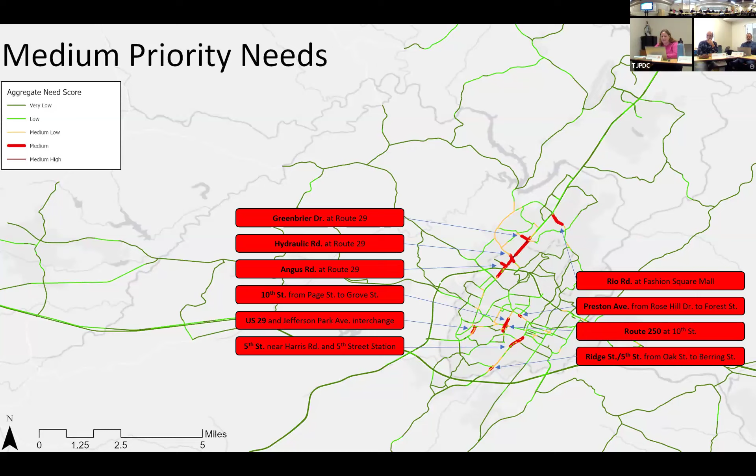And then when we go on to the scores that were between 4 and 5 with the aggregated needs, you can see that we start growing the list of needs. A lot of these are on our radar as far as concerns specifically around the 29 corridor, 5th Street, and 250. I think we're all aware that there are some concerns there.

And then we can go down to the medium low needs. So probably these two categories would make sense to identify as high priority needs based on the aggregated score. These could be considered medium needs.

And again, I think this makes sense intuitively to me, at least, why these projects are included. I think most of us have some awareness about most of these locations.

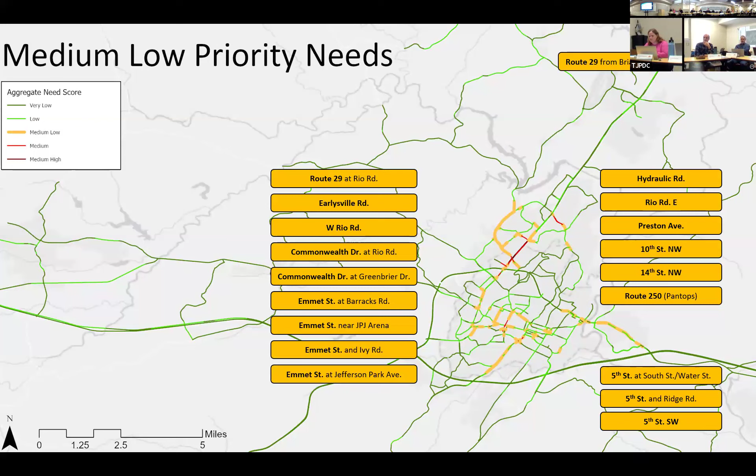And then if we go down to the last screen, all these segments that are in the dark and light green have often been pulled in as needs, just not necessarily triggering those higher need thresholds.

So the next step is really going to be to have you all review this information. Tell me which of these make sense. Make sure that we're vetting all of the need segments to determine whether we already have funded projects addressing some of these needs, so we can remove those from our candidate project list.

And then we'll start working through our candidate project list to determine which projects we already have queued up, have done some level of analysis, and have been developed enough to bring onto our list for consideration in our high priority constrained list. We'll also identify segments where we don't have a good project identified yet, so we can flag those for planning priorities.

So that's going to be our next step. But this is the data analysis piece. We're going to map this against the public engagement that we received. We have a heat map, so we're going to overlay these two.

And then we're going to be working with the localities so that we make sure that any of the priorities they have identified are also being pulled into our long-range transportation plan, to make sure those are supported as well. Do you want to add anything at this point, Alan?

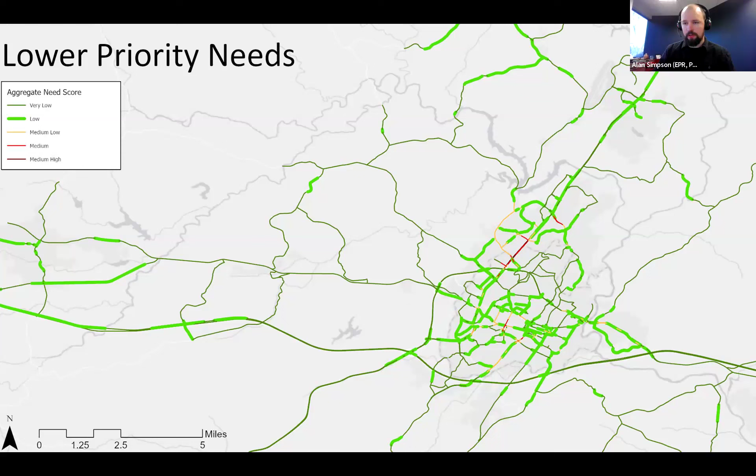I don't have anything to add right now. I think you covered pretty much everything, but if there are questions, I'm happy to answer them.

Okay, so any questions or discussion from you all - anything that surprises you, anything that you think shouldn't be included that was identified, or anything that should be included that maybe hasn't been identified in one of these top tiers at this point?

And I know that doing this analysis, it did not include the committed projects that you mentioned. But just to emphasize again, if there's a project in the city or county that overlaps with one of these segments, that project might not necessarily solve that need. But at least, even if it's small, it would be really helpful to bring that in and compare it to the need to see if that project might resolve it or at least influence it in some way. That would be great.

Do you have, Alan, sorry to put you on the spot, we didn't discuss this ahead of time, do you have the public engagement heat map you could share? I do, it'll just take me a moment to pull it up. One second, okay, just so you all can see that as well.

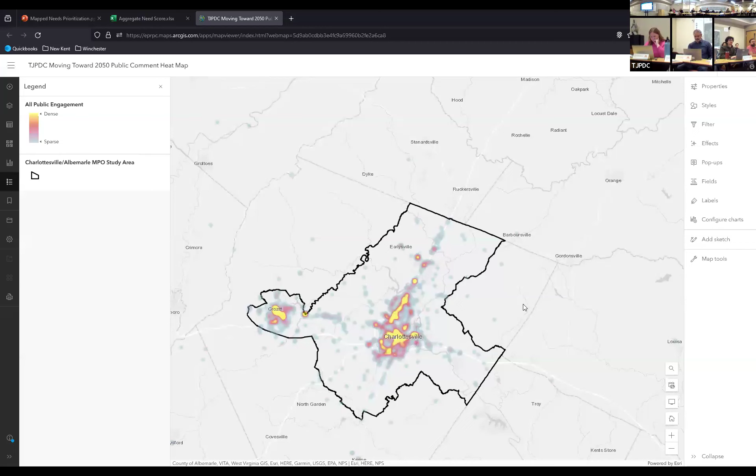So this is the heat map of public comments received from all the public engagement we've done. Sandy, is there anywhere you'd like me to zoom into, or do you just want to take a look at it overall here? I think if there's anything that maybe stands out to you as being in addition to what's seen in the data analysis, if there's anything you want to walk through.

Yeah, the first thing that jumps out to me is that Crozet is represented much more heavily on this map than you see in the needs prioritization map. I think at first glance the 29 corridor is well represented here. Downtown Charlottesville seems to align pretty well with the segments we just looked at. You've got some heat spots further up 29 North, the airport, obviously a couple of interchanges up there. Crozet, a little bit over, it's not the most intense heat map section, but closer to Ivy you've got some activity there. So I think this picks up a few things that aren't included in the needs prioritization map, but there's also a lot of overlap.

I will say, in terms of corridors, I'm surprised it didn't show up as a medium or high priority, East High Street. I mean, we are seeing it's pretty well lit up on our public comment map here, but it didn't really show up on either of those. And that's one of the reasons we like to do the heat map on the engagement too. The quantitative data can show us what's going on really from the data-driven side of it, but sometimes that data has holes in it. Seeing what the public sees in their qualitative experience of the transportation network might help us identify what data is maybe missing from this, or if there's a different angle to that data.

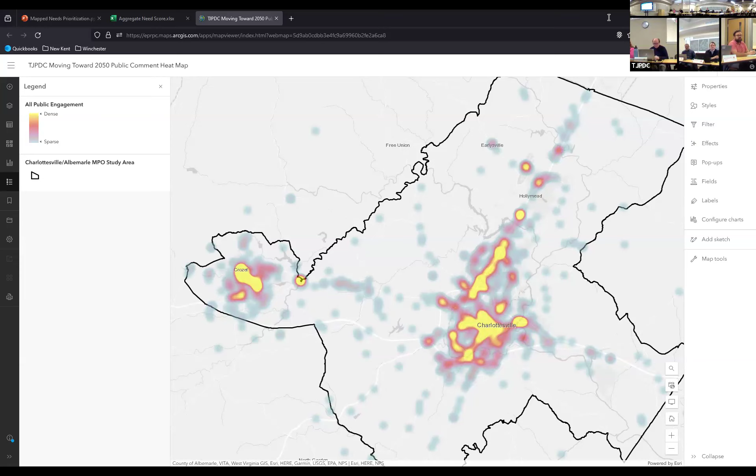That's also kind of needed for the people who participated in this process and past processes, just to show what people are talking about. Certainly this process, and no LRTP process I know of, is a census of everyone. So of course there would be some response bias of what areas are represented or not, but it's at least showing a general geographic distribution. Again, that's not the only analysis we're looking at - it's not just geographic, but also what they were telling us, what specifically those comments are, and how that connects with the needs and the projects. So that's just one way of looking at it.

Again, that map Alan was showing, we can make available on the SharePoint as well. It's a little overwhelming to see all those dots on one map.

We also overlay future growth projections on areas. That's where the travel demand model would potentially provide some additional context, with the caveat that it was a fairly high level review of the growth projections. I think it still gives us a good indication of maybe where there are likely going to be problems in the future, but it's not necessarily 100% consistent with the new Charlottesville zoning ordinance and comprehensive plan, for example.

We are updating the travel demand model, so by the time we do this in five years, we'll have more precise information for you all.

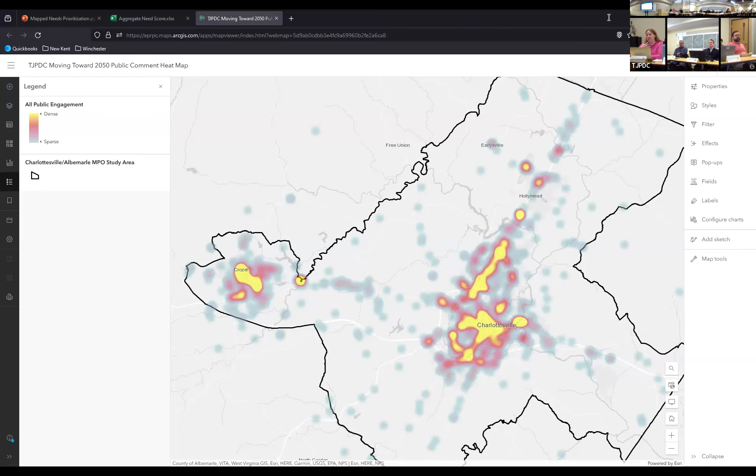So if you all want to spend some time looking at this, I'll continue to put more information into that SharePoint file. I may not update you all as I do that, but you're always welcome to check back into that and explore that information. If you have comments, feedback, or questions, please feel free to shoot that to us, and we can make sure that's incorporated as we start evaluating the projects.

Yes. And another thing, just keep in mind, this is all data, and the PDC is not taking the approach of just blindly following exactly what this data says - if it shows red, that's what we're doing. We're presenting this data to decision makers to help them make the best decisions they can. There are some quantitative aspects to this, but it's really there to help you all and the policy board think through, given what we're seeing here, to help us make as informed a decision as possible.

And just going to amend, I wasn't super concise with my language earlier. On the needs map, I said any projects in those needs areas could possibly influence things - that are committed and funded - but also if there's some pending land use application or element to it, that can certainly influence things as well. We might not be able to calculate exactly how that would influence the needs, but at least being aware of it matters. So if one area is showing up as red, and there's a huge new development coming in that's imminent, that's a good thing for us to know.

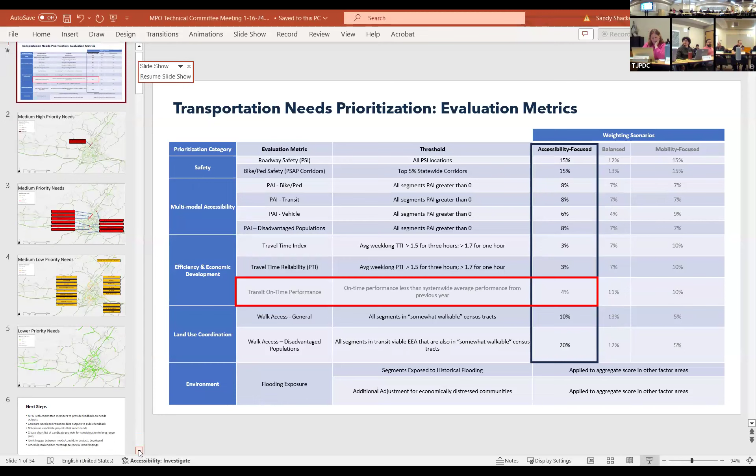So we have been working to vet all the potential projects that the MPO would be eligible to submit. Our goal is really to have consensus around the projects that we're going to move forward with and that we want to be pursuing in the next month or two.

If you all feel like you can make a recommendation this morning, certainly happy to receive that, but we can also continue to have this discussion next month as well. So with the new changes to the Smart Scale scoring process...

That significantly limits the number and types of projects that MPOs and other regional bodies are eligible to submit. So we're starting off with looking at what we're eligible to submit that we have enough information on to move forward and prepare an application for.

One thing I want to mention is that at the most recent CTB meeting, the Commonwealth Transportation Board reversed their vote on land use. So land use is back into being a consideration, but it's in that modified application—it's a multiplier. So it will still have much less significant impact than it did, but it will still be part of the consideration.

So based on the action from the CTB, and based on our list of projects that we've been working through and have enough information to move forward on, the projects that are potentially candidates for the MPO to submit would be a DDI or another identified alternative at the 64 and 5th Street interchange.

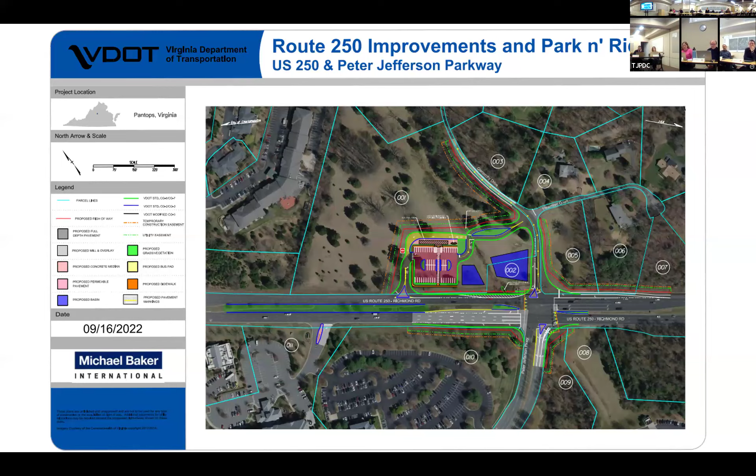And then at Rolkin Road, this would be adding some pedestrian crossing at 3 of the 4 quadrants - across the southern portion and northern portion of Rolkin Road, and then across 250, and then also adding some sidewalk along the south end of Peter Jefferson Parkway or Richmond Road.

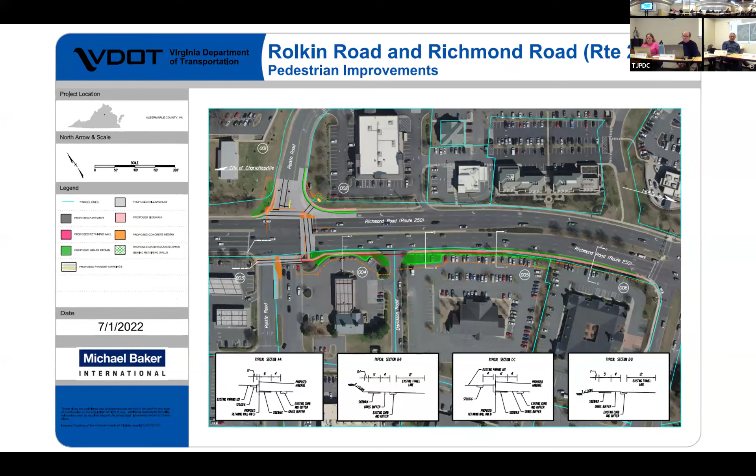So again, this could be submitted as a bundle. They actually both scored pretty well in Smart Scale. Peter Jefferson Parkway, that project had some significant benefits aside from land use, so that is a project we can submit. Yeah, they were both - Rolkin was right on the bubble. It would have been the next project funded if we had more money.

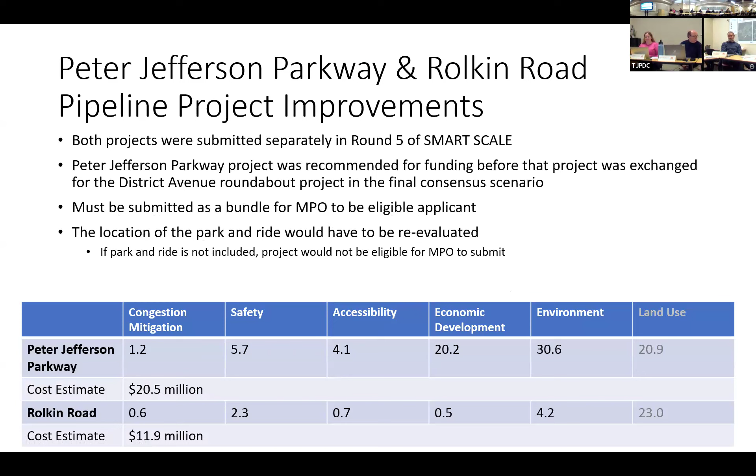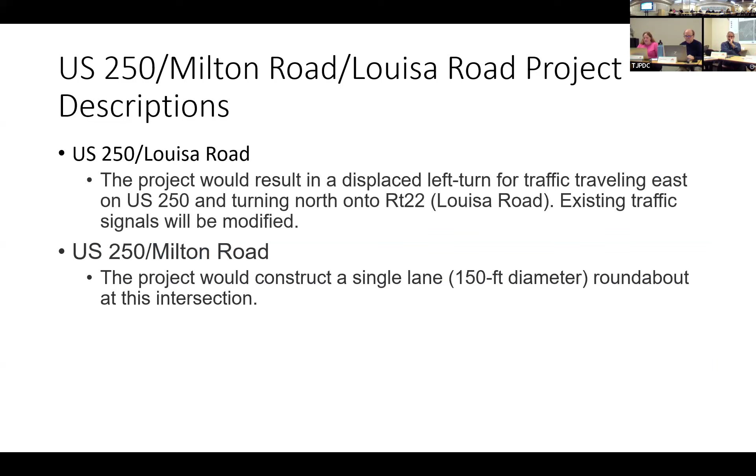All right, and then the next project is the US 250 Milton Road and Louisa Road project. Again, this is a set of 2 projects. One thing is that while there are some safety needs identified there, neither of these scored very well on Smart Scale. So the MPO could be eligible to submit it, but it probably isn't likely that it would be competitive. At 250 and Louisa Road, this would add a displaced left turn at that intersection, so there wouldn't be turn movements allowed from 250 onto the road here.

Basically, you make the left turn in this area right here and get over on the other side of the road, and you would travel down here and then make the left at the intersection. So you can't make the left from the through lane, it just goes through - you make the left from this lane here. Is that signalized there? Yes, it would be signalized. So you cross over - the through lane, you'd be on the outside of the receiving through lane. And then the right turn lane is moved over further.

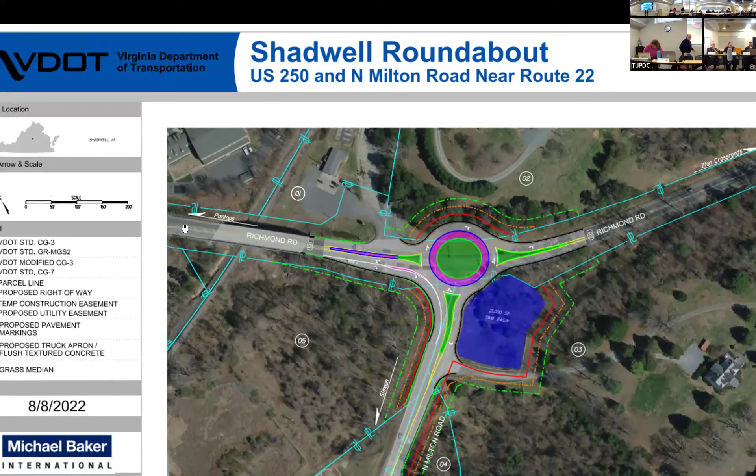It's because it's expanded, that's why. There you go. But yeah, that seemed to be the most feasible, least expensive option. We did look at a roundabout, and from an operational standpoint, it didn't work as well.

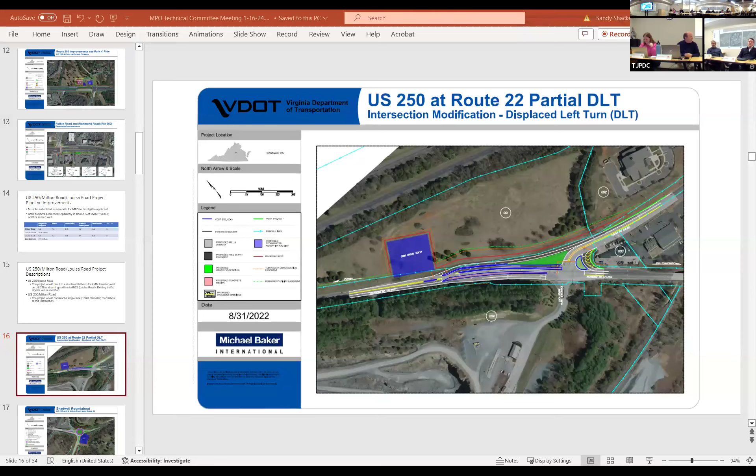So mainly the issue there is the approach from 250 eastbound - that's where the issue is. It's the left turns, the queues, the rear ends and that stuff from that direction. And the entrance to Luck Stone, with the trucks traveling out of there, takes them a while to get up to speed, which means you've got to give them more time to cross the intersection. That's where the issue is.

But like I said, it didn't score - those both scored pretty low in the rankings, so I don't think they're a good option. Part of it is there's not a lot of economic development out there, and there wasn't a lot of land use, so they didn't get a lot of points in other areas besides safety. So it just didn't have enough benefit to justify the cost.

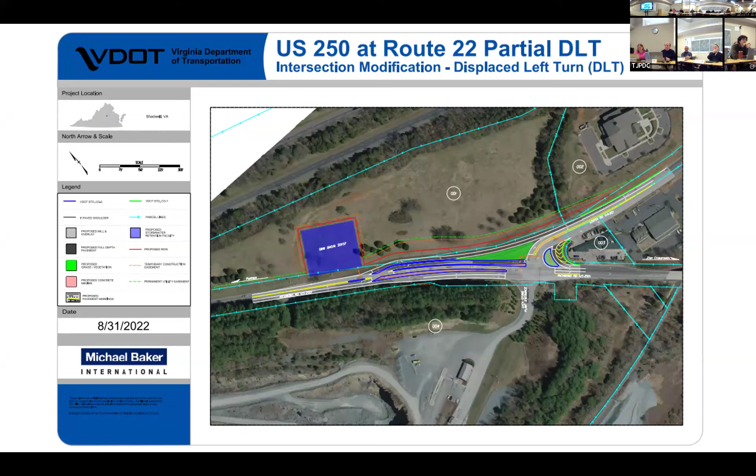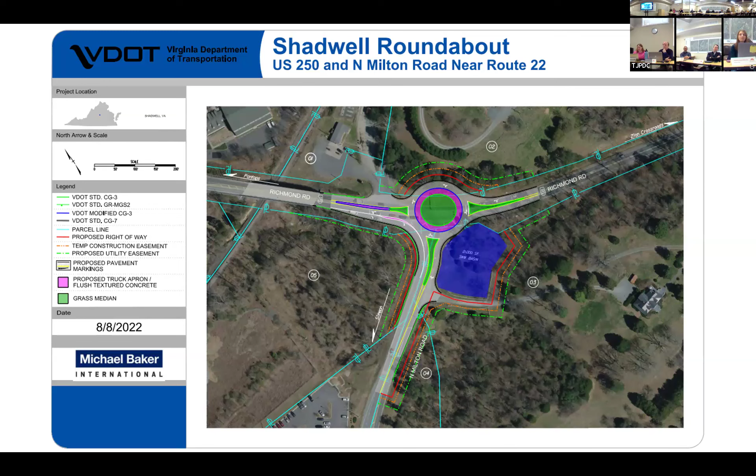And then there was also this roundabout that was proposed at Shadwell to address the concerns there. Again, this is a project we could submit, it's just not likely to be competitive.

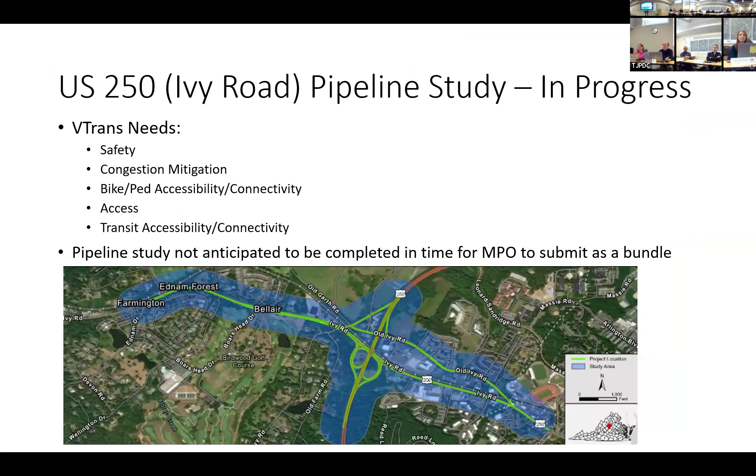And then we have the two pipeline studies. As we discussed, there could be some opportunities to submit projects. The biggest issue is going to be the application readiness to get through a lot in a very short period of time. And then the Hillsdale South extension - this one's also interesting.

I think it does have some good benefits for the area. It did get a lot of points, it scored really well in round 4 when it was scored, but it also got a lot of points from land use.

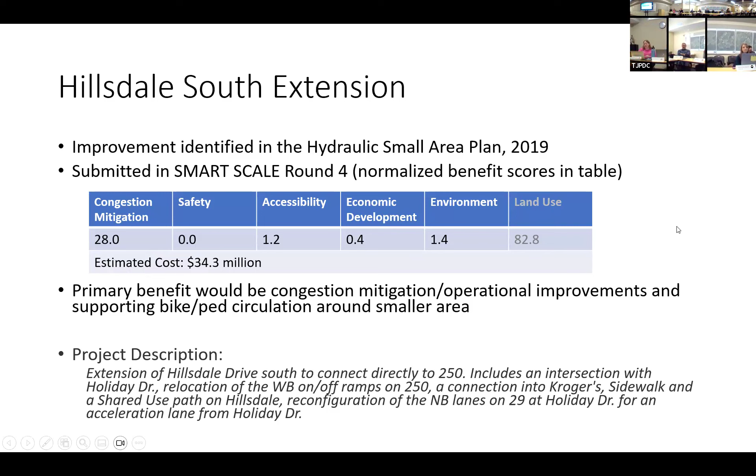So the question is, would that be competitive moving forward? I don't know, but it also did get quite a high score on the congestion mitigation point category, so it could be competitive.

As a reminder, this would be connecting the Hillsdale South all the way from this roundabout that is going in at the Whole Foods intersection, connecting it all the way down to 250, closing some of the ramps between 250 and 29. So all of the traffic that wanted to make these movements would be directed through the local road networks, and then also adding in some pedestrian and bicycle accommodations.

Again, I think if we wanted to keep this project on the queue, we could continue to consider it, but not for this round.

Yeah, there's two things regarding that project. Because of the changes in the regulations for SmartScale, we have to look at the operations and do a little bit more detail on the interchange changes. The other thing is the roundabout location at the northern end on Hydraulic Road is shifted.

So that's going to create an impact at that connection point, actually, without significantly impacting Kroger's. So I don't even know if we can make that connection anymore. We'd have to really look at this a lot more in detail before we could resubmit it.

So all of that said, the recommendation at this point would be to prepare the applications for the interchange improvement at I-64 and 5th Street based on the completion of the operations analysis and the public survey, to do the bundle of projects from Peter Jefferson Parkway and Rolkin Road improvements, and then to pick up any applications for the two pipeline studies that might be ready in time.

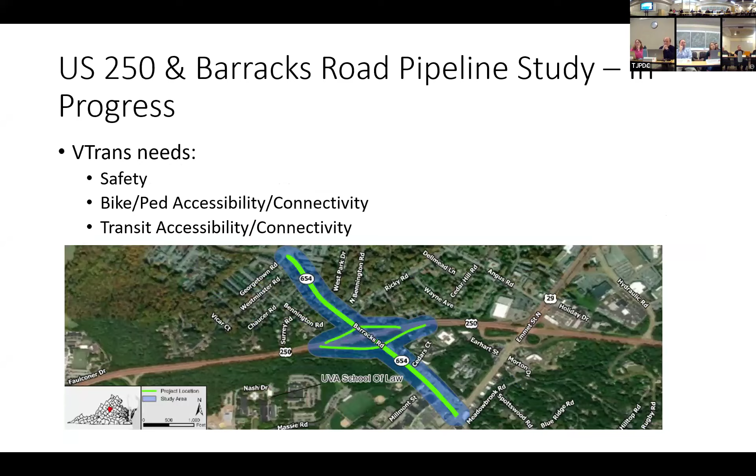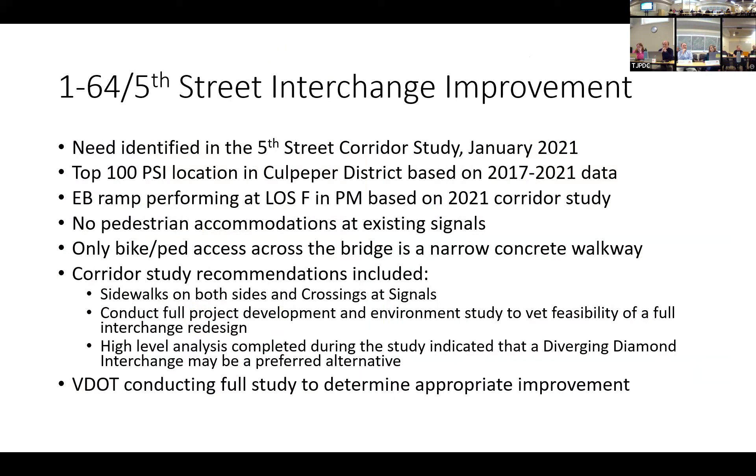So we're talking about doing a divergent diamond. If you go to the next slide, it looks like we're talking about the whole general area. I'm assuming this is just copied from the study. What would be the limits of the project if we were to do a divergent diamond? Could we do a divergent diamond and the component that we had in our last SmartScale submission up to Harris Street? That seems pretty critical to me to get both of those in there.

Possibly, it's going to significantly increase the cost. The cost is going to be the driving factor. Right, I mean fortunately both the termini have experienced many more crashes than when we did the study, so their safety benefit of doing an improvement there is going to be great.

Yep, I don't know, I haven't looked at Fifth Street Station Parkway to know how it's faring from a safety perspective. I know from an operational perspective it doesn't operate very well. So I don't know, it's possible that it could be, I don't have that data.

Once we get the one done, we might be able to marry them together as one application. But like I said, we're pushing the limits to getting Fifth Street ready. Can we talk about what this project is?

Yeah, I'm so unfamiliar with this.

So last time we had, it was basically Fifth Street Station Parkway up to Harris Street. It goes from Harris Street to the entrance to the Holiday Inn, or that crossover right there, where that new development took place on the east side of Fifth Street, where the Starbucks and stuff is. It went from there all the way to Harris Street, and it reconfigured the intersection at the Parkway, Fifth Street Station Parkway. And then the interchange project would basically take off from where that ended and go across the bridge.

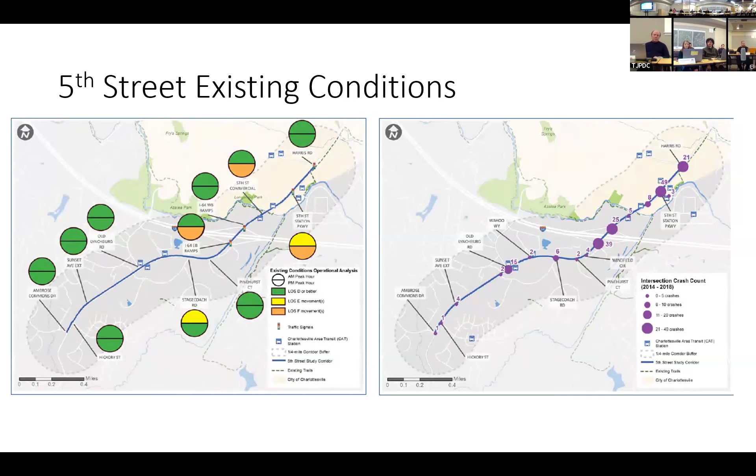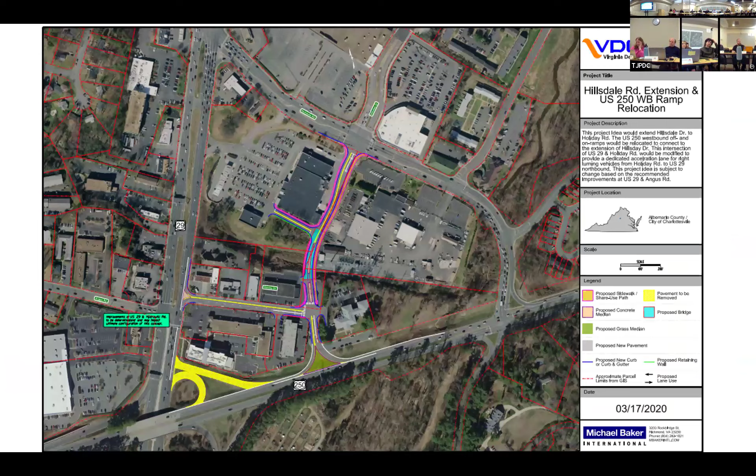Any other discussion? You don't need a recommendation, right? I think just general feedback - are you all comfortable with moving forward on these projects, or anything we should remove from the list or add to the list?

There really isn't anything available. Sandy and I talked and went through everything we thought could be eligible, and these are the only 4 projects we could come up with. Ivy Road, like I said, might be something we might not be there in time. It just needs independent review.

I just didn't know if you wanted some clarity on the first one, to say considering from Harris Street to Stagecoach. Yeah, at least get that perfect, like that. That might be valuable.

I can't remember if we counted Stagecoach or not, but I know they counted the entrance. I don't know if we counted the Parkway, Fifth Street Station Parkway. I know we counted the entrance, the first crossover there at the Holiday Inn, and then south. I don't think we went all the way to Stagecoach.

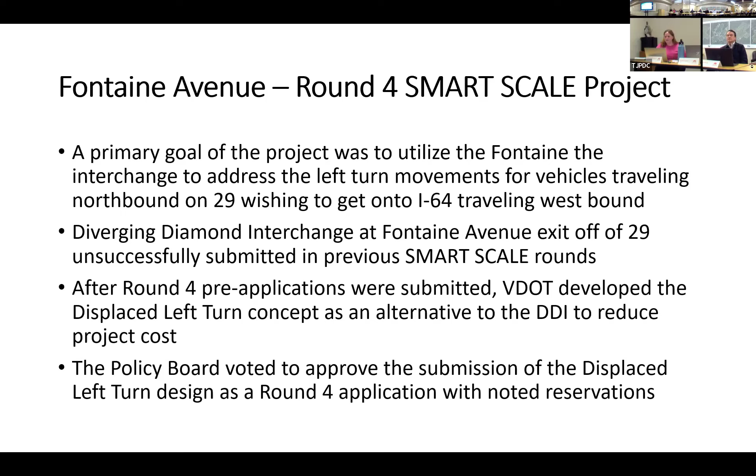So the current design is this displaced left turn. Basically, we would be closing the left turn onto 64 right here. That movement would no longer be eligible. Instead, vehicles would travel up 29 north, past where they would have made that movement previously, take the Fontaine interchange, and there would be a protected left turn going up through the interchange. Vehicles wanting to get back onto 29 southbound or make that movement onto 64 would free flow through, have a protected left turn, get back onto 29 southbound, and be able to take the exit from 29 south.

That was the concept. What happens if you go through with this free flow displaced left turn onto 29 south is that you would have to stop the traffic. There could be no movement directly through this intersection, so you wouldn't be able to go straight through. And if you were coming from 29 going northbound and wanted to turn left onto Fontaine instead of turning right, you would no longer be able to make that movement.

Instead, everybody who did not want to make that movement onto 64 would basically turn right at the interchange onto Fontaine. And then if they really wanted to go left onto Fontaine, they would go up to the intersection with Ray Hunt, make a U-turn, and then be able to go straight through the other way.

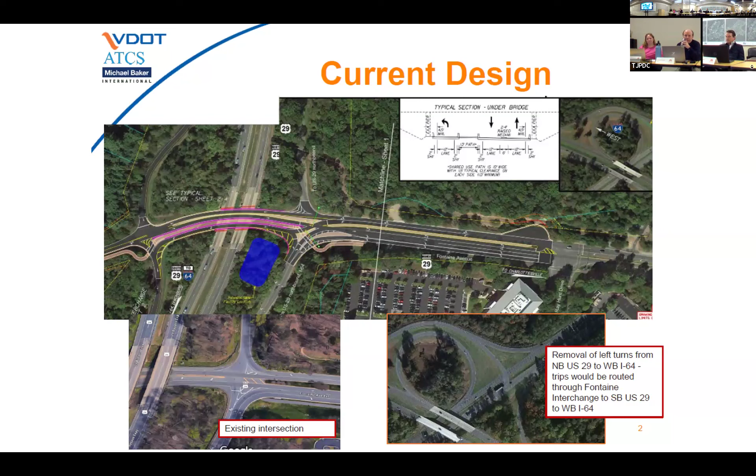So what we're looking at now is there are a couple of concerns identified with this displaced left turn concept. First, coming off of 29 southbound making an exit onto Fontaine, there's a really high volume of left turns that aren't addressed as part of the displaced left turn concept. There are limitations based on the width under the bridge. I'm not 100% sure how that factors in, but that was one of the considerations.

There were concerns about closing some of the movements available off of the interchange. And then there were a lot of concerns, specifically from UVA, about this loon that was going to be designed in order to accommodate any commercial vehicles that needed to make that U-turn movement. A truck pulling a trailer would have to make that maneuver.

And you've got the park at the reservoir, so you do get a lot of trucks pulling horse trailers. West of the interchange there's not a lot—you've got the church, a couple of parcels. There's one vacant property that's been in several times for development; that could come in, but we don't know what's going to be there. There's a big school being built there. So those are some things, but they're not high, large vehicle generators, other than the larger vehicles that might be going out to the reservoir.

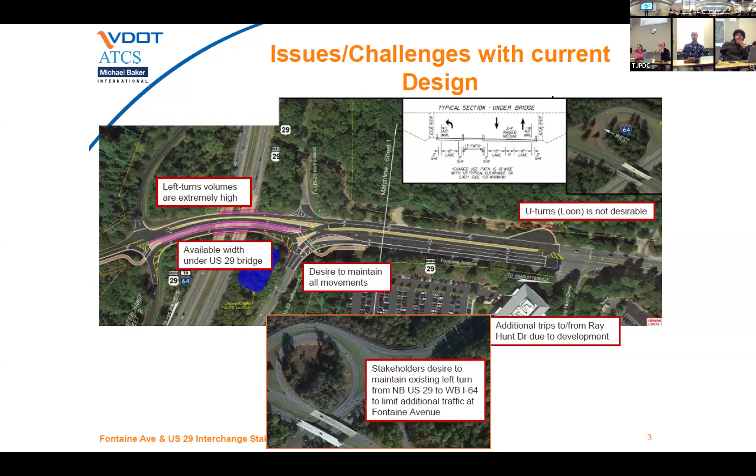Just adding extra traffic. So all of those concerns were considered, and then VDOT worked with consultants to determine what some of the other opportunities might be in this area.

So there were a couple of requirements we started with when determining what the alternatives could be. The first is that the project cost needed to be within the amount awarded for Round 4, so there wasn't a lot of additional cost that could be supported for any alternative. And whenever you change the scope of an awarded SMART SCALE project, it would need to be reevaluated—the alternative you want to move forward with would have to be rescored using the methodology used under the round the project was awarded.

So that means any alternative concept would need to be rescored using that SMART SCALE methodology to make sure it still has the same benefit-to-cost performance. The highest benefit score for this project came from the land use score, largely due to the inclusion of a shared use path facilitating access through that interchange. So any of the alternatives needed to continue to keep that shared use path.

So there were a couple of alternatives that had been considered previously that were not re-reviewed as part of this analysis. They did not reconsider roundabouts, and they did not reconsider the diverging diamond interchange—those had been ruled out. The continuous green T also had been previously considered as an alternative that was ruled out based on either cost, operations, or a combination of both.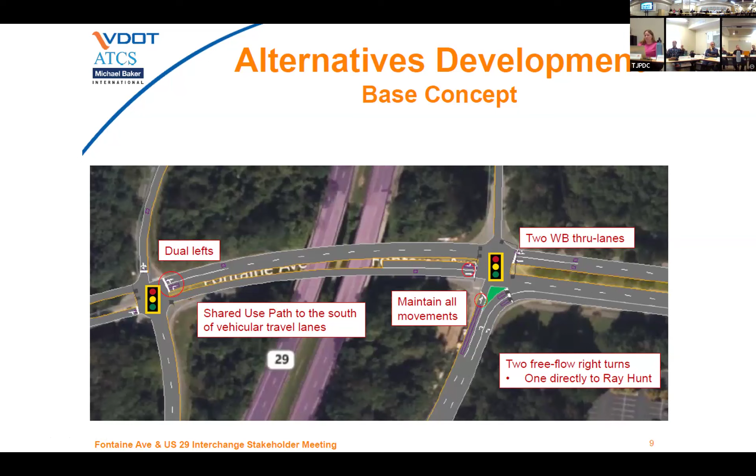And so where's the shared use path in this? The shared use path is still going through this portion of it. Still is down—well, it's also in front of Fontaine Research Park, right? Yeah, like Ray Hunt, it stops there already. It stops at the off ramp. This would continue it across—if you go back to the Ray Hunt slide, there's still a shared use path going across there, across those 5 lanes plus a slip lane.

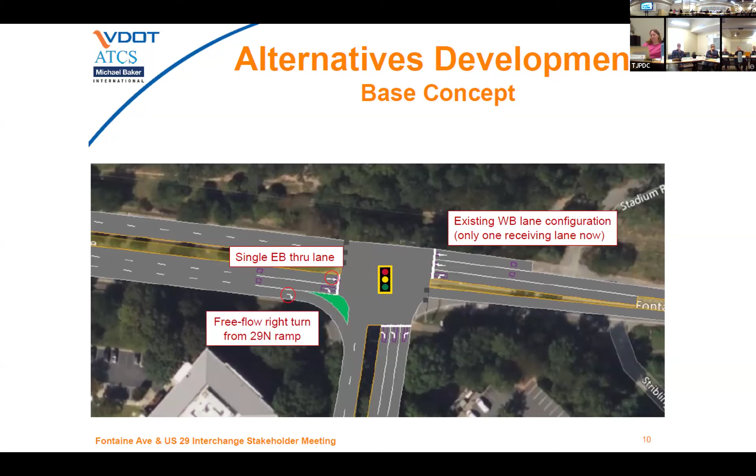Yeah, that's existing—there's just like a pedestrian signal, like a phase on the lane. Well, there's a button you can press, it'll give you a walk signal. So it's basically the same, except now there's this slip lane with this much bigger turning radius. That's right. Okay, yep.

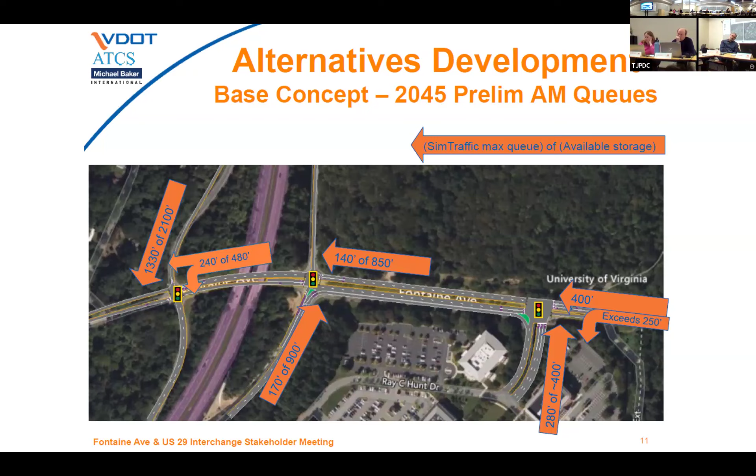Alright, so they did some analysis looking at the queuing and looking to see how it performs. The important thing is that all of these alternatives we're going through, at least these next 3 concepts, are resolving the operations or addressing the operations along Fontaine. They are not addressing that left turn coming from 29 northbound, turning left to get onto 64. Let's take these first 3 concepts off the table for that issue. It does improve some of the queuing and operations along Fontaine itself, and coming out of maybe Ray Hunt.

To let you think about the left turn—you're coming north, and then you're making a left turn onto Fontaine. No, I'm talking about south of this interchange, where you're coming up 29 northbound and turning left to get onto 64. None of these first 3 are addressing that. Right, let's see your picture. Yeah, I think they're trying to solve—yeah. And none of them address the other left turn you mentioned earlier, which is when you're coming north from 29, turning left onto Fontaine.

Yeah, some of these do address that. The first one didn't, but this next one will because it adds a second left turn lane. So the second one, this upgrade to the base concept, adds a second left turn lane coming off of 29, and that reduces the queuing that's occurring right now. What it does though, is it still closes the ability to make a movement coming off of the 29 northbound ramp.

So this median basically would be crossed over. So anybody who wants to go left onto Fontaine would still need to turn right at this light, and then it would require adding back in that loon at the U-turn movement to facilitate that movement.

What's the reasoning for closing it there at the interchange? Is it just to get those three lanes that turn left? Yeah, I think it's to try to make the movements as efficient as possible, reduce the conflict so you can move vehicles through as efficiently as possible.

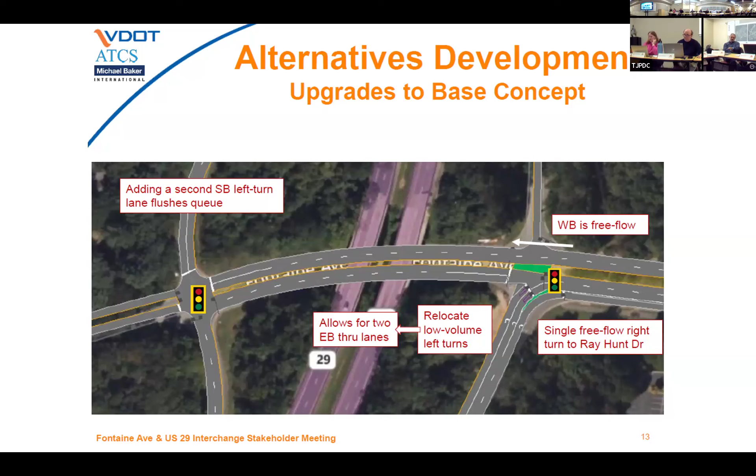So that's the upgrade to the base concept. Again, if you want to look at the operations, there's operations data here, but you can see that this is what starts addressing that queuing coming off of that southbound lane. I think it was like 1,300 or 1,400 of the 2,100 capacity.

Yeah, that's gonna grow. It's not just a school, it's a campus that's being developed for the region's schools. They're gonna combine two schools with growth. So that's actually a significant development.

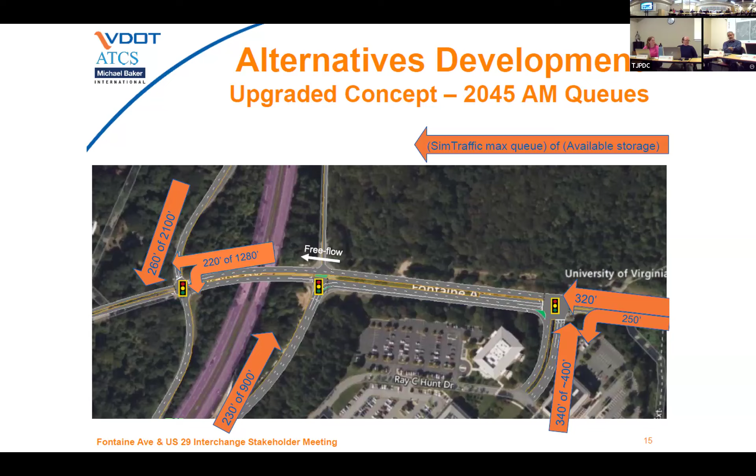I see it, there is still some queuing challenges at this intersection at Ray Hunt. Can you remind me and everyone, do these queues take into account the new development at Fontaine? Have you kind of resolved that in terms of demand? So when you see that 450 of 400 feet queue off of Ray Hunt, is that accounted for?

I'm not sure. I know we were trying to get the data from the university on what those were gonna be -- I know there's been some communication. I think my understanding is that we got the information, but I haven't been involved in it, so.

Hal Jones has been coordinating with ATCS on the analysis and all this work. I don't know what data you guys gave them, so that's the other issue. Well, I think there was a lot of conversation. The master plan has a lot of development proposed.

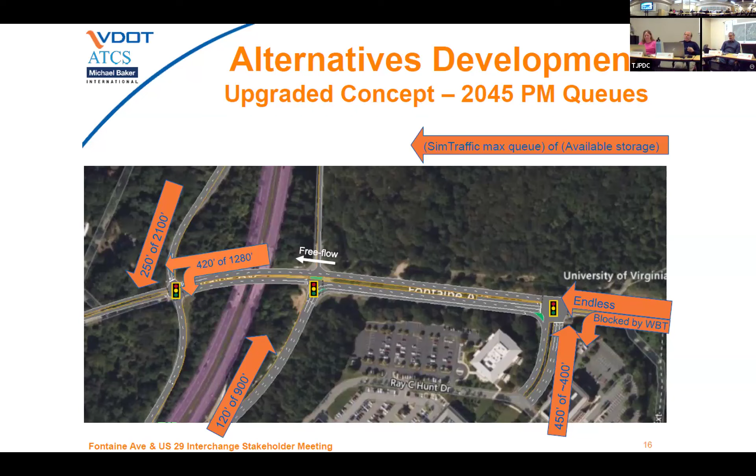And to go back to the upgraded concept at Fontaine again, this one. So there's two lanes eastbound now, east of Fontaine.

Those are there currently, or in the base concept? What do those — the two right turn lanes? No, the two through lanes, like east of the intersection on the right side. Yeah, we only have one. There's only one there. It's got to merge before you get to the city boundary.

So you're adding a second lane into the city in this concept? I think that's actually the next concept, where you add the lane going into the city. So this is the upgrade, and then there's an ultimate alternative that extends that into the city.

I don't even know if that's the existing condition now — that's got a lot of history. So this solves the operation concern coming off of 29, but it does add the U-turn movement back in.

It's not shown on this graphic. Yeah, it's indicated in the text box, but not drawn in. I'm not knocking it.

There was a study done before the University took over Fontaine Research Park, that as part of their phase 2 expansion added that lane through the signal and then merged it down before you got to the city. So basically, it got you through this intersection and then merged down. It didn't go into the city.

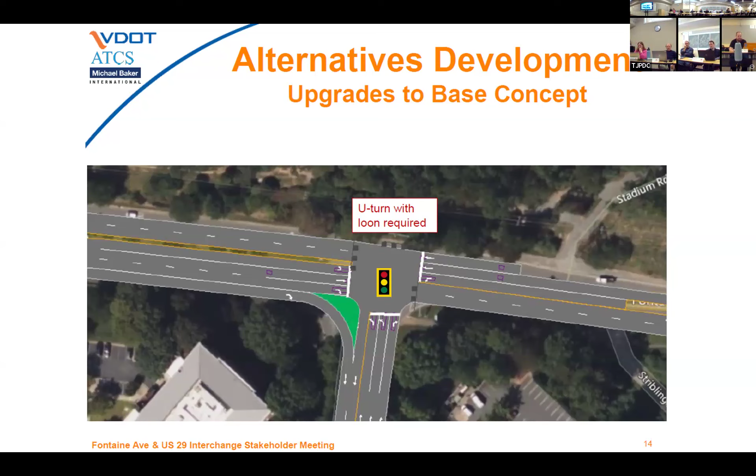That pavement's there now, it's just straight. You could go down to Stribling, and once you get to Stribling, you're at the city limits. You need to put it on the bridge.

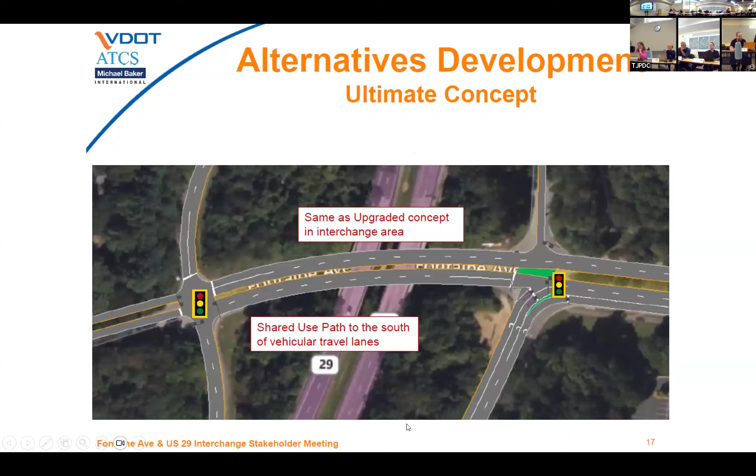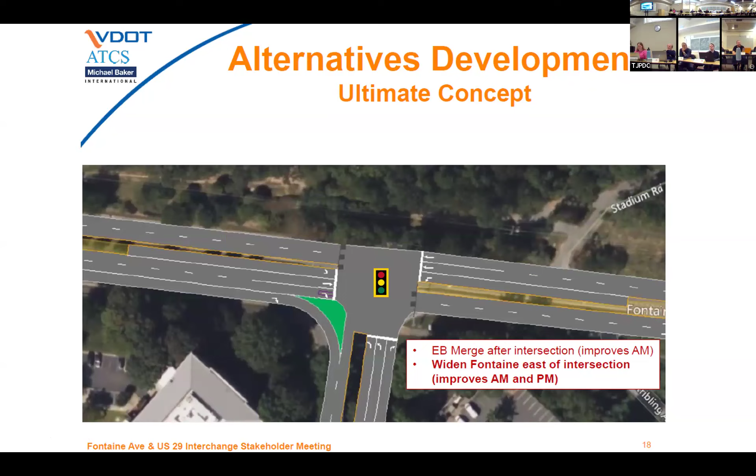So then the ultimate concept is the same as the upgraded concept in the interchange area. And then there's an eastbound merge after the intersection, and you're widening Fontaine east of the intersection. They don't show how far — it doesn't show how far.

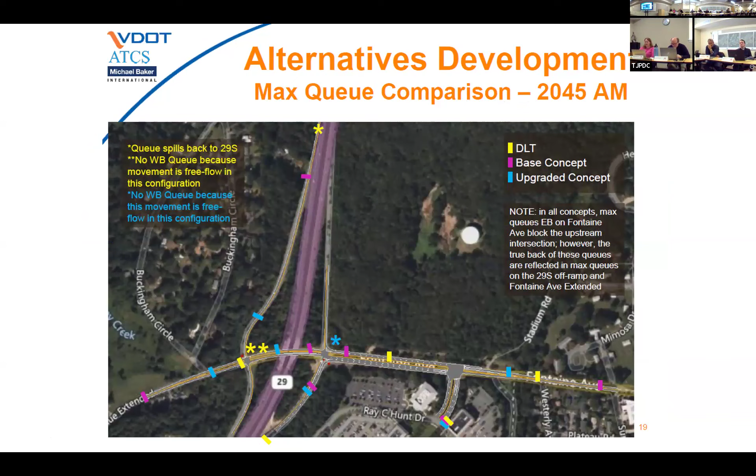This graphic is a little bit confusing to look at, but it shows the difference in where the queues would be using all of the different concepts. All that said, this is what we had prepared ahead of time — this is what was in your packet — but there was one additional alternative that has just recently been floated.

The operations analysis has not been completed yet. I just got a call this morning saying add this into the presentation, and it's something we can vet. It's basically still taking those northbound movements we're talking about — closing that northbound exit off of 29 going west onto 64, and redirecting it through the intersection, but using the conventional or signalized improvements to facilitate those movements.

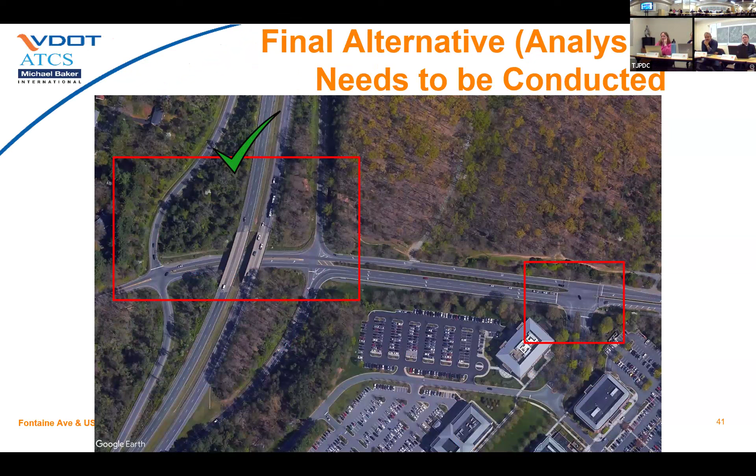So it would still add the second southbound left turn coming off of 29 onto Fontaine. Basically, any traffic that needed to make that U-turn movement would just have to go through the interchange at Fontaine, wait at the light to make the left turn movement, and then wait at the next light to make this left turn movement. This would be a choice lane, it looks like, right here — the third lane turning right, but it could also go straight or make the left turn, so you're able to preserve those movements.

Yeah, that was a question I was gonna ask, because it seemed like we had that option in the first one, and then we moved away from the left turn there — but if we're still signalizing it, it just seemed like you could have the choice lane.

It's just a matter of how many phases you have to have on the signal, and some of them have downside implications with it — the fewer phases you have, the more traffic you can process.

So I think this would have to be vetted to determine what the queuing would be coming off of this interchange, to see if you'd run into any of the operational concerns that haven't been completed yet. Yeah, I talked to Sean this morning — they met on this yesterday, so that's why we've had this new information.

They saw when they ran the VISSIM analysis on the other concepts that there was capacity available within the signal coordination. So what they're doing is looking at making these changes and rerunning it, routing that left turn traffic through and making a few modifications to see what it's going to run, but it won't be done until the middle of next month. So more to come on that.

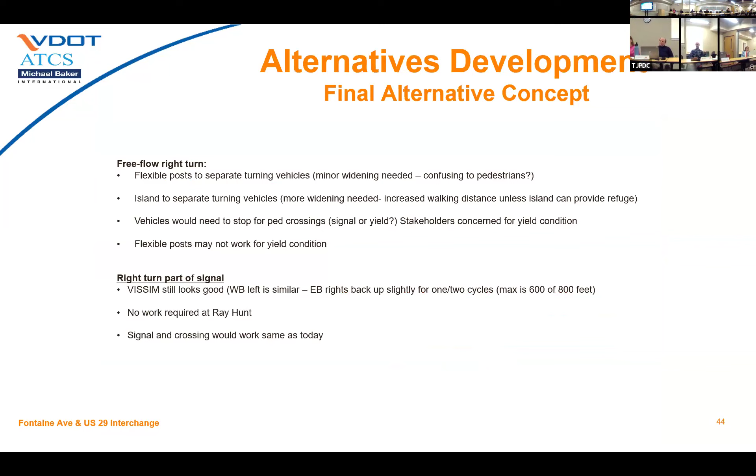So what's going to be happening is we'll have to make a determination - the policy board specifically will have to decide what direction to move this project forward. The options will be to move forward with the project as scoped, that displaced left turn, to cancel the project and resubmit potentially an application for a different concept if we're just not satisfied, or to pursue one of these alternatives that have been reviewed. This last alternative that's recently been developed looks promising, but we don't know yet if it's going to solve all the problems.

We get all our points from the land use - did we just do the shared use path? That cancel it? I don't know the answer to that. Didn't you say there's an issue, and not just the left turn lane? Yeah, there's safety issues, for later I guess.

I mean originally, when we first looked at this, there were several fatalities at that interchange where the left turn is. There haven't been any in a number of years, but there were several within a couple-year period that were directly related to that northbound left turn. And that's why we originally looked at trying to change this.

Trying to make that left turn work any other way - they can't, and you don't want to signalize that with an extra signal. That would cause all the traffic that wants to get on 64 to stop, and it's already backing up now, right? I've heard it's really bad.

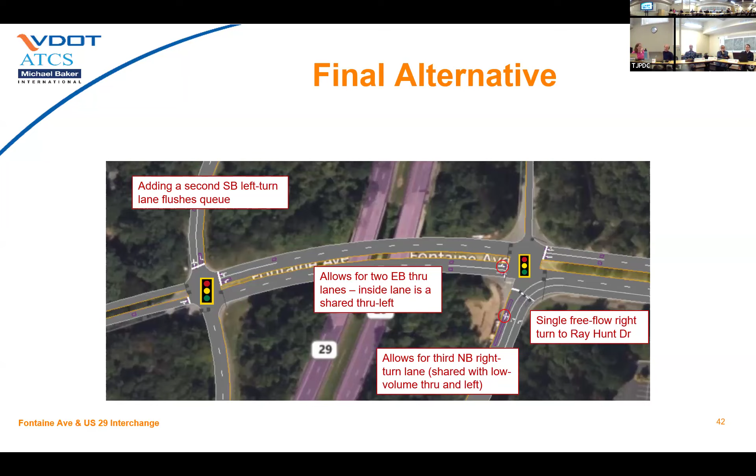I'd just like to say thanks for hearing the concerns and really looking at additional alternatives seriously, and trying to, everybody's trying to work together to find something that does the best it can here.

So there are a couple of factors for consideration. This is in your packet, probably. So what's going to happen is next month we're going to be asking the policy board to make a decision on this. We'll have more information.

I think part of it is weighing the priority between addressing that northbound left turn movement and the operations along Fontaine, and trying to—maybe this is the ticket to solve all of those problems. If not, there's going to have to be a discussion of what is the priority problem we're trying to solve here. One of the concerns with potentially canceling the project and reapplying is that so many of the benefit points came from land use. It's not clear whether or not a different project would be competitive for funding under the new smart scale rules. So we'll have more information, but we wanted to introduce the concepts and discuss the alternatives in the process before there was a need to make a decision.

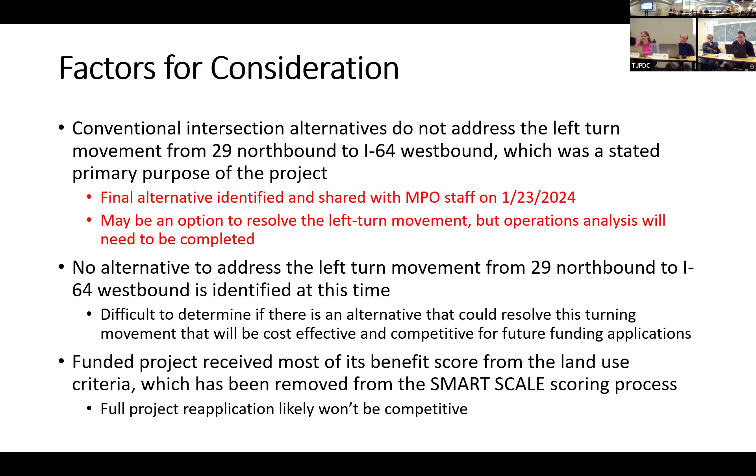And yeah, stay tuned, we'll be bringing this back. Cool, yeah.

Alright, yeah, 10 minutes, sorry, we're short on time. No worries.

So as you all know, the Transportation Improvement Program is basically our plan that approves federal funding allocations within our region. So when there are funding allocation changes that are over a certain percentage of the original project budget, we need to come in and amend the funding schedule, and that requires approval from the MPO. So this round of TIP changes includes a couple of amendments, which are those bigger financial changes. And then we also have a few TIP adjustments, which we're just sharing for informational purposes. These are all related to transit.

So the first TIP amendment that we are asking you all to review is an amendment from CAT, which updates the financial allocations for FY24 for the replacement rolling stock amount that they have actually received based on the funding formula and their requests. So what happens is, as they replace the rolling stock earlier than they previously anticipated, that means they are also going to be reducing the amount they are planning to spend on rolling stock in the future.